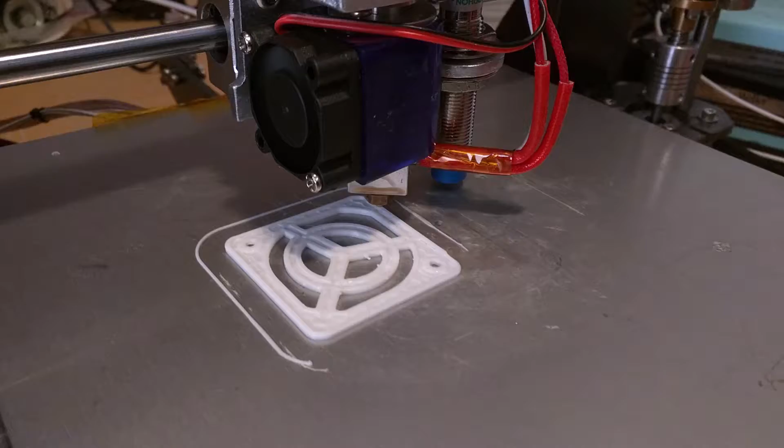Hmm? You didn't have a roller hooked up to it yesterday. No, I just hooked it up. Look at this, these are hexagons, they're not circles. Isn't that crazy? It's so fast, hey? Yeah. Hi.

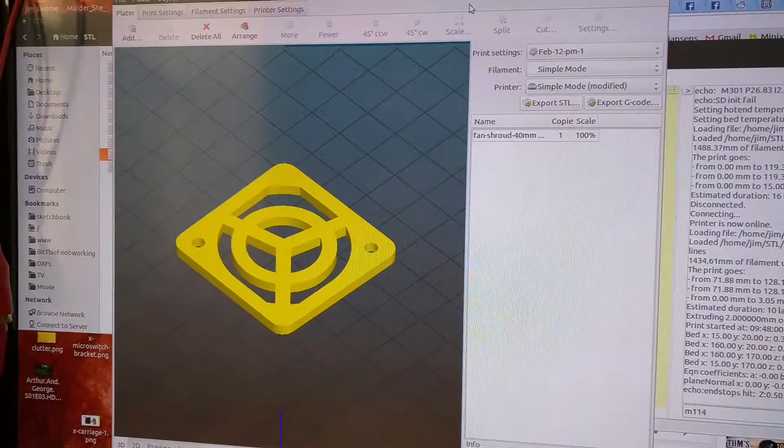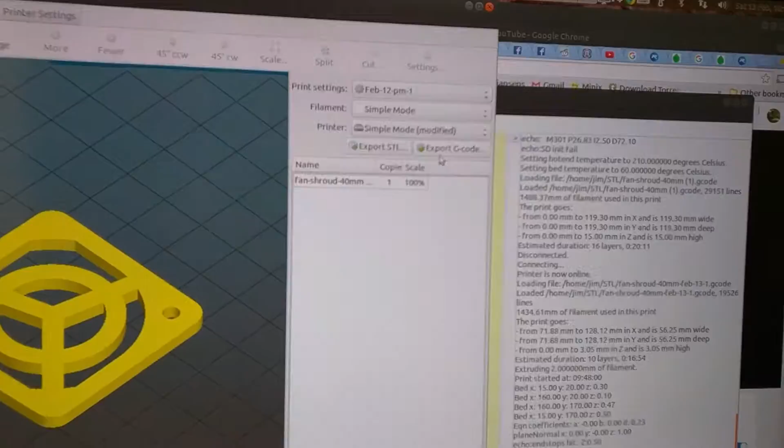Alright, so there's about 3.5 minutes to go, it says here, and this is what I've done. I sliced it in Slic3r, this software right here, SLIC3R. I've got the printer settings altered just somewhat, altered a ton. All of the settings I've gone through. I've just tried to make them as appropriate as possible, and exported the G code to just a file.

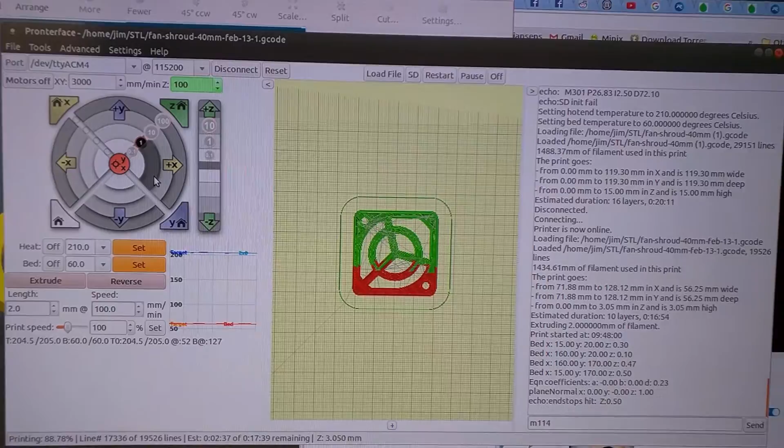And then I'm using Pronterface, Printrun to print and control the printer. So I took the G code generated from the Slic3r program and just loaded it into this guy here. The auto bed leveling's completed and everything is working perfectly. The final code inside of the Arduino and the Marlin has been run through, and my offset, you can see right here, is negative 0.3 for my Z.

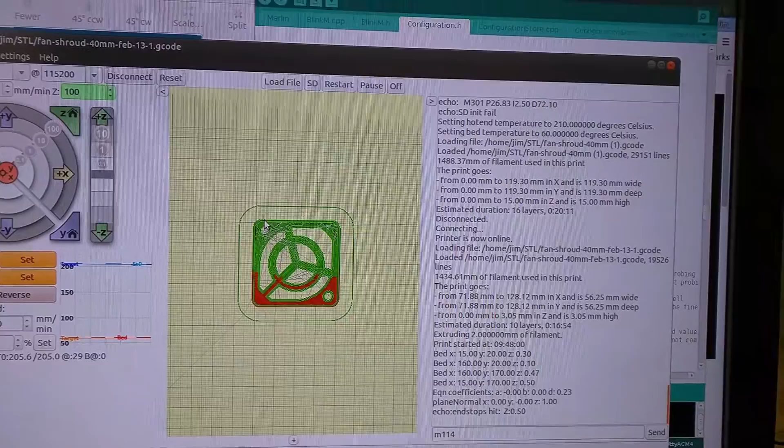So at home and an auto level, the software from now on will drop 0.3 millimeters lower to establish the initial print height. And the first layer was a little on the thick side, so I might drop it down a little more, but...

Anyways, I took this code here that is so close to perfect and recompiled it and loaded it into the little Arduino that's inside the electronics box. The power supply seems to be running well. It's cycled on and off with the fan control maybe 5 or 6 times. The controls on this LCD function, it's really nice just to see a readout, so I am enjoying that.

In terms of operating the printer with the controls, I sorted that out last night, and the thing does work, so you can jog it all around without being attached to the computer, which is really nice. And I think it's just finishing the print off here. So, according to this, it's got 47 seconds left. It must be on the final layer now.

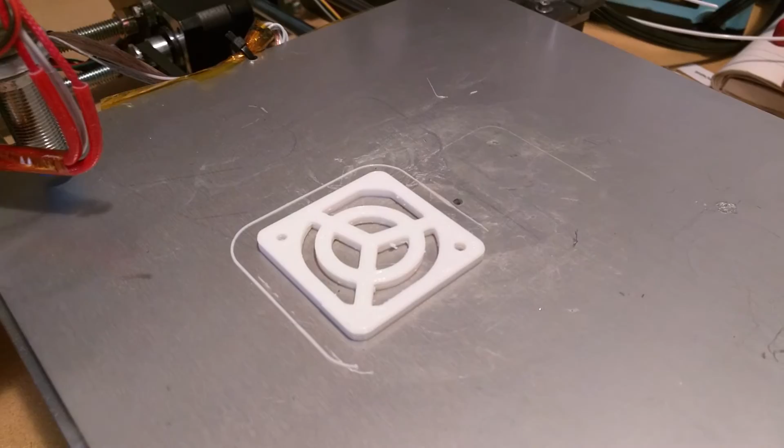To check the motors, they're not hot, they're just barely warm, including the extruder motor, because you could overpower the extruder motor and it gets so hot it could soften the filament, so it can't feed it, it'll just mash the filament. But all of these motors are a really great temperature, very cool, cooler than at school.

And I might install a thermistor inside of the electronics box to find out what the temperatures are near the Pololu heat sinks, because there's one more thermistor port open that we could read from. But everything right now is just working very well. The draft coming out between this lid, it's got a gap in it.

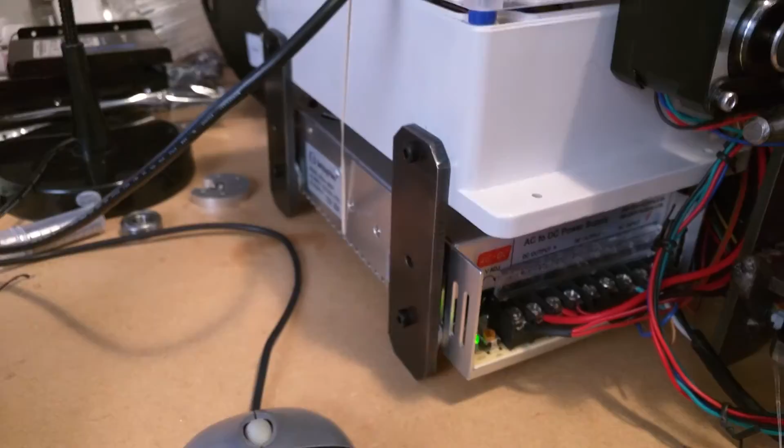I've just raised the lid here, so the fan is pushing cooler air in right here, and it's just pushing it out here. I think the entire box is ventilating pretty good, and the air coming out of it is very cool. So I'm thinking that it's probably done. We need a spool rack.

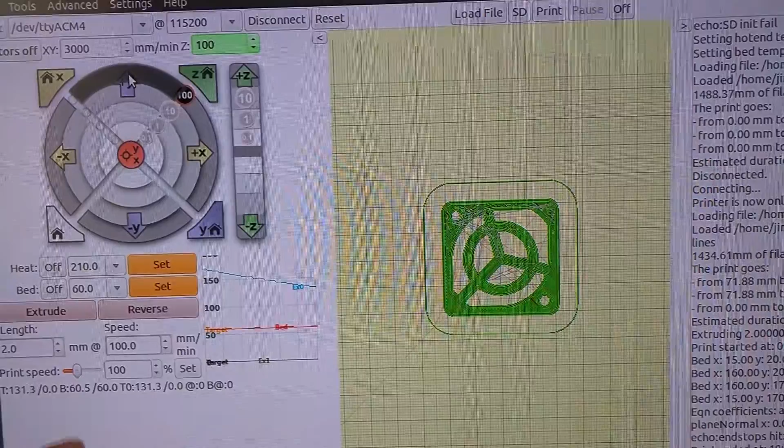The temperatures should drop off, but it looks like over here the extruder temperature is dropping, but my bed temperature is staying up. So I can just drop the bed, a command in the G code and the slicing file for the end run, also to turn off the bed temperature, turn off the bed heater. So I think that the major tweaking is done, and that's a really good print.